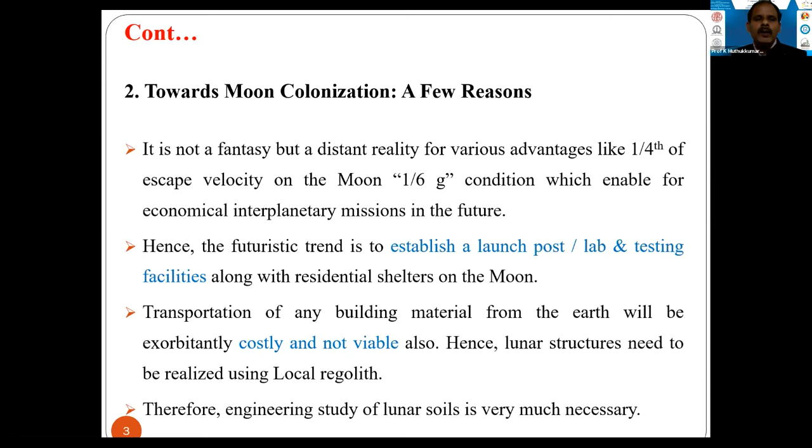Therefore, the engineering study of lunar soil is very much essential. As some of you may be aware of the recent missions, especially Chandrayaan-2, basically we want to build a rover system. This rover consists of several wheels, and the wheels will be decided with respect to the weight of this rover, as well as how these wheels interact with the regolith, the lunar bed.

So based on these aspects, our lunar vehicle rover wheel needs to be designed. Typically you can see on the right hand side, this is the Apollo rover mission. So the primary aspect is we need to know about the interaction between wheel and soil.

There are two things with respect to the interaction study: whether our wheel is a rigid wheel or a flexible wheel. This is typically what we have in the terrestrial transportation system on Earth. Basically, we build a good surface pavement system, and this pavement system is decided based on the soil condition present at the project location.

So you can do a systematic study on the subsurface, subgrade soil, and depending upon the subgrade soil characteristics, you can make a proper pavement system. Over that, you'll have your wheel movement. So here your wheel is moving on a relatively rigid surface, and the whole resistance is governed by the frictional resistance between the wheel and the subgrade pavement system. So the problem is very simple.

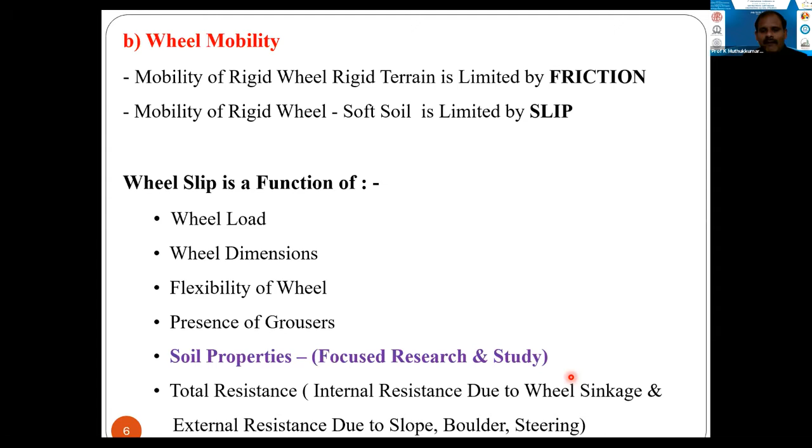But we'll be concentrating more on how these moonquakes are going to have an impact on the constructed facilities, assuming that we are going to create a shelter, our own landers and rover. So how this system is going to have an impact when we have a moonquake - that is what this study is going to explain.

So the performance parameter, especially decided with the wheel soil interaction, is based on four important aspects. One is the sinkage - how the wheel is going to settle on the soft lunar terrain, and how much the settlement. With respect to the settlement, we need to design what torque we need to apply to the wheel to move on that particular surface.

And the slip - the limited climbing capacity and steering radius needs to be decided with respect to the slip which is created between the soil and wheel. And drawbar pull is very, very important, it reveals the maximum resistance that can be overcome by the wheel such that wheel movement will progress further. And the drive torque is completely decided by the motor specification requirements, all with respect to the wheel soil interactions.

Since the lunar soil is primarily an influencing factor of lunar mobility, it is very essential to assess the geotechnical properties of the lunar soil for the design of lunar rovers and landers. So as the primary objective, we have done a study related to the geotechnical characteristics of the lunar soil.

Both the bearing as well as the traction capacity of the soil depend on the shear characteristics of the soil. The shear strength parameter of the soil depends on the angle of internal friction, cohesion, and the shear deformation modulus. The bearing capacity with respect to trafficability depends on the settlement due to soil compaction under vehicle weight.

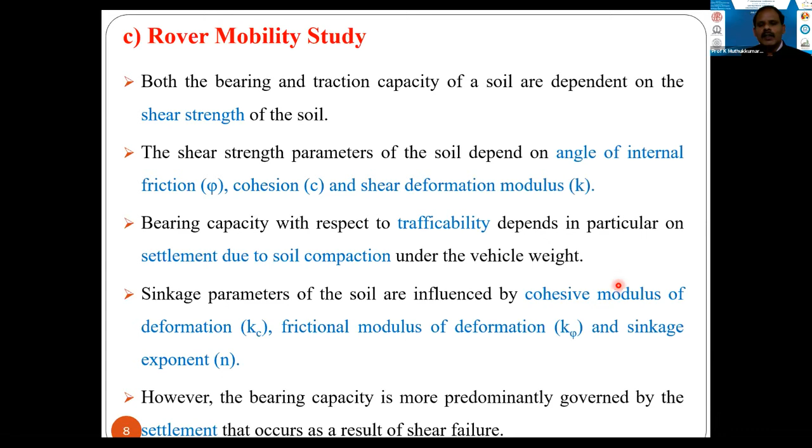With this background, we intend to characterize this developed lunar soil material. We concentrated on these properties: especially the cohesive modulus of deformation, friction modulus of deformation, sinkage exponent, cohesion stress and friction angle, shear deformation modulus, wheel sinkage ratio, and the wheel soil coefficient. These are the important aspects as far as considering the tests we have conducted.

So from the direct plate load test, these parameters can be obtained. And from the direct shear test, we can get these parameters.

From the wheel soil interaction study, we can get all other remaining parameters. Coming to the moon surface, it is not like our Earth surface where we normally deal with a 3-phase system of solid, water, and air. The moon is a monophase system, completely solid phase only. The soil is a single grain structure.

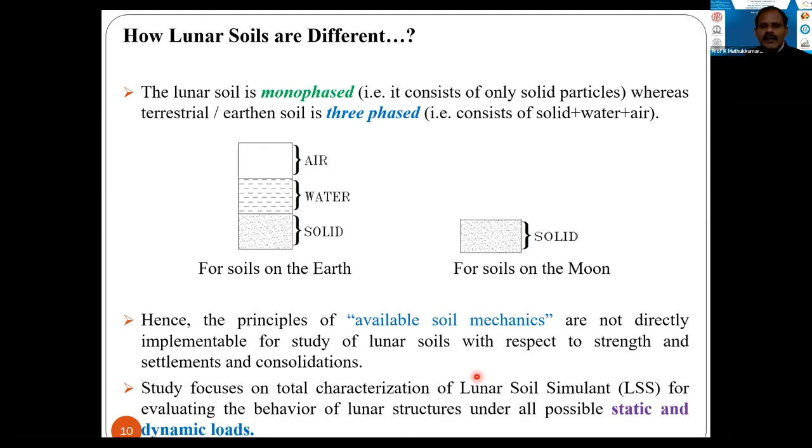So the existing theory we have considered for Earth, the so-called soil mechanics, may not be directly applied to the moon surface. The available soil mechanics are not directly implementable for studying lunar soil with respect to strength and settlement. So the study focused on total characterization of lunar soil simulant for evaluating the behavior of lunar structures under all possible static and dynamic loads.

We basically followed the terramechanics principle to obtain these lunar characteristics. This is the typical lithology of this lunar material. Up to the top 10 meters, we normally call it the regolith material. This material is fine grain, a reworkable surface deposit, and the relative density varies from 60 to 65 or 70 depending on the location. It is grouped under the medium dense category of surface, followed by several subgroups, and our main focus is this region.

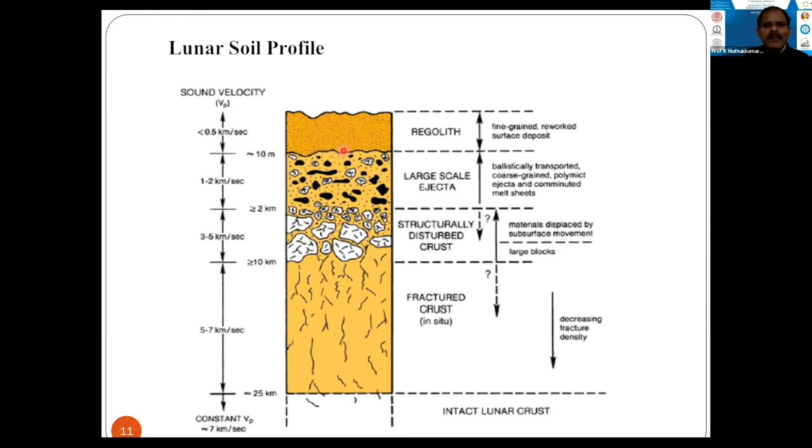As far as lunar rover mobility is concerned, our primary focus is the regolith material, as the foundation is also expected to be within this region and depth. So our primary focus is to create a simulant such that its characteristics are more or less the same as the lunar regolith material. That is what we extended.

We have a limited lunar soil brought back from Apollo missions, almost 380 kg of returned sample, most available with NASA. NASA has given clear guidelines with respect to the simulant, and the simulant properties have been developed by NASA based on the Apollo missions return sample.

Our primary focus is to map a material such that its mineralogical composition, chemical composition, and mechanical composition are as similar as possible to the brought-back moon soil. That is our primary study.

The soil grain is mostly less than 1000 microns, with a major percentage being fine grained soil, 20 to 800 microns. There is a predominant amount of fine grained soil less than 75 microns, but this material is completely inert, as there is no water on the moon surface and no possibility of developing cohesive stress. The predominant force is frictional rather than cohesive, even though the particle size is small. So we call it a non-plastic material, even though it significantly consists of particles less than 75 microns.

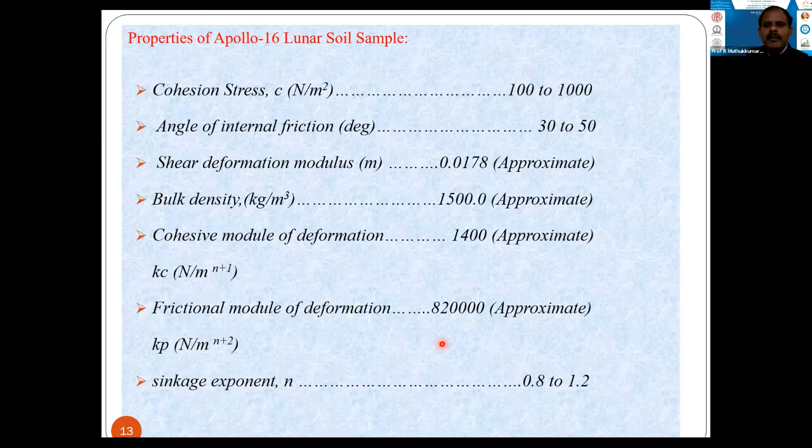These are the properties given by NASA related to the Apollo 16 mission, and our primary idea is to map these characteristics with respect to the developed simulant.

One aspect is we want to map the material's flow properties to the lunar regolith condition. The second important aspect is how this material responds to the actual lunar environmental conditions, which are completely different.

We have a huge temperature variation, minus 150 degrees to plus 107 degrees centigrade. Even in the polar region the variation is slightly higher, and at the equator the temperature is much more than given here. So there is a huge temperature difference between the polar and equator regions, and from day to night. The material we develop must withstand that huge temperature variation with limited property change, which is a very important aspect.

We want to simulate a simulant such that it can endure the huge temperature variation. The second important aspect is continuous meteoroid impact, which creates a lot of radiation effect on the soil material, especially in the regolith material within the top 10 meters depth. So lunar materials and structures should optimally resist dynamic stresses caused by moonquakes, and also mechanical impact transferred by continuous bombardment from asteroids and meteoroids.

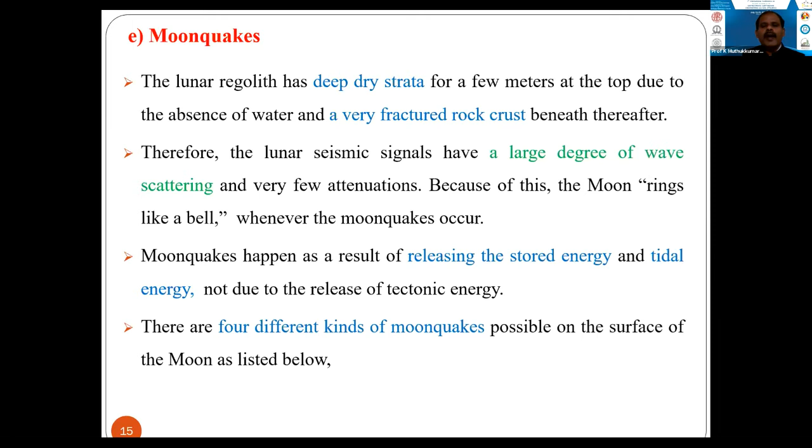So there are 4 different kinds of moonquakes possible on the surface of the moon that are listed here. The shallow moonquake happens from 20 to 30 kilometers below the surface - this is of more concern for us than the deep moonquakes. The deep moonquakes occur about 700 kilometers below the surface, probably caused by tidal variation, basically called the moon tides.

And the vibration from the impact of meteoroids is another important aspect - this is like a local vibration. Since the moon is subjected to a lot of meteoroidal impact, those who have seen the moon surface might have seen a lot of craters. These craters have been created because of continuous meteoroidal impact. Some of the craters are several kilometers in radius, creating time-bound vibrations. These vibrations will also be a cause for concern when we have a structure which is very close to this kind of meteoroid impact.

Another important aspect is the thermal quakes, caused by the expansion of the frigid crust first illuminated by the morning sun after 2 weeks of deep freeze. So huge thermal change, temperature variation, is also creating thermal quakes. These are the 4 important aspects. As far as the lunar structure is concerned, shallow moonquakes and the impact of meteoroidal and thermal quakes are very, very important, so we need to have our regolith protected.

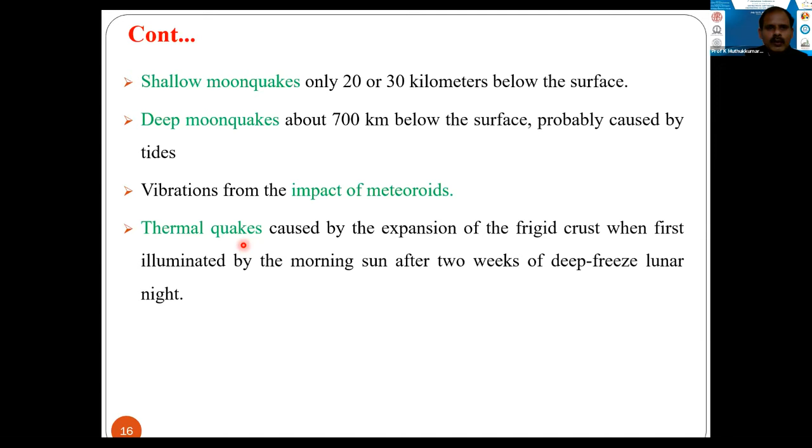We need to protect our structure against these kinds of moonquakes. Deep moonquakes happen with respect to the tidal periodicity, once a month or 7.5 months, depending upon this periodicity. The shallow moonquakes are the most energetic seismic events compared to the deep moonquakes and release more energy.

The third type of moonquake is impact, which occurs regularly due to the impact of meteoroids. Apollo seismometers in the Apollo missions 12, 14, 15, 16, and 17 continuously installed seismometers on the moon surface, and these seismic events have been measured and monitored by the Apollo missions. Based on that data, they have reported recording almost 13,000 moonquakes - deep quakes, shallow quakes, and a combination of all these things.

Normally, according to the Richter scale, the measurement magnitude of moonquakes was less than 3 and mostly less than 1. So the occurrence of magnitude 3 moonquakes is very rare, but the most common type of occurrence of moonquakes is close to Richter scale 1.

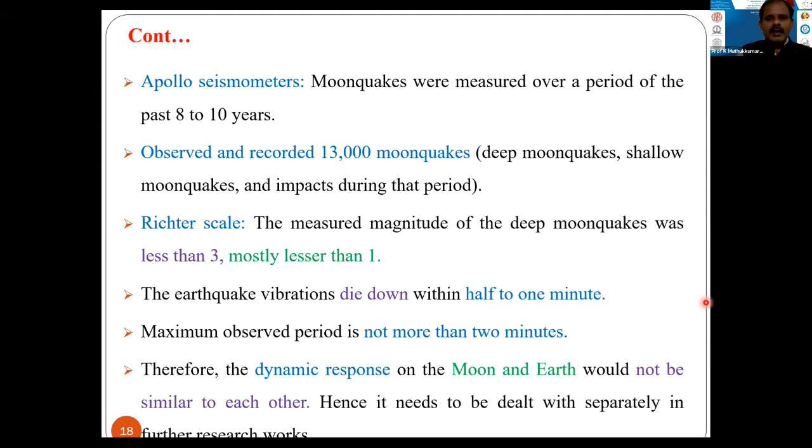So these are such low energy moonquakes. The moonquake vibration dies out within up to 1 minute, and the maximum observed period is not more than 2 minutes. Therefore, the dynamic response of the moon and earth would not be similar to each other.

Hence we need to deal with this separately and develop a theory for moonquakes. Some literature outcomes show that the occurrence of moonquakes rarely reaches 3+ magnitude, these are shallow moonquakes, and the most frequent occurrence moonquakes are having...

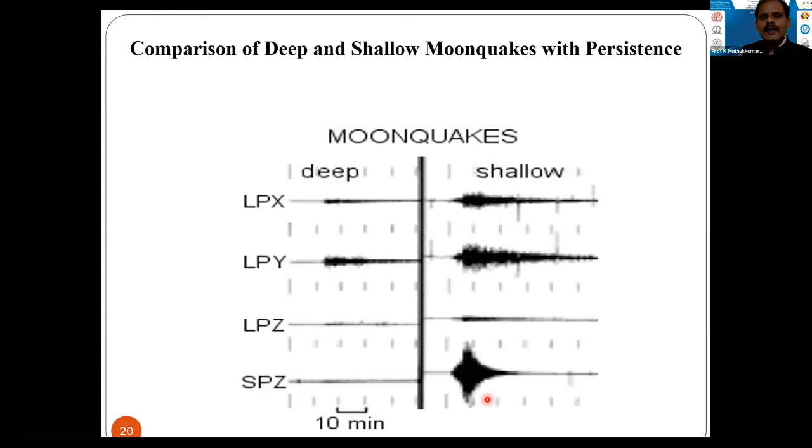Sure. So this is just a comparison about deep and shallow moonquakes. On the right side you have the shallow quake, which is the one having more impact on the surface. If at all we have any structure on the surface, we'll be in trouble. We need to really consider this aspect. And this is the occurrence of the deep quake with respect to various time frames.

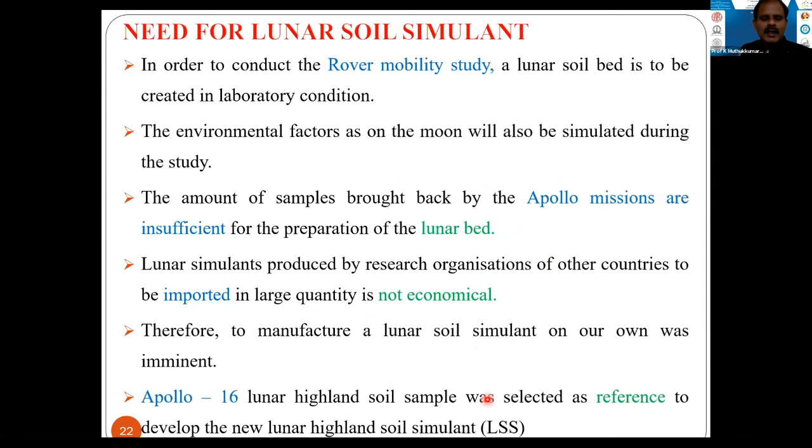So considering all these aspects, the primary focus is we need to develop a simulant, and then we need to study the simulant with respect to all these characteristics discussed so far.

So, the development of new lunar highland soil simulant, what we did: we have taken Apollo 16 as a reference, and we want to do the complete study for Chandrayaan 2 and 3, the Chandrayaan 3 mission project is going on. We need about 50 tons of LSS for doing all this rover and lander study in the ISRO laboratory. So for that we did a systematic analysis.

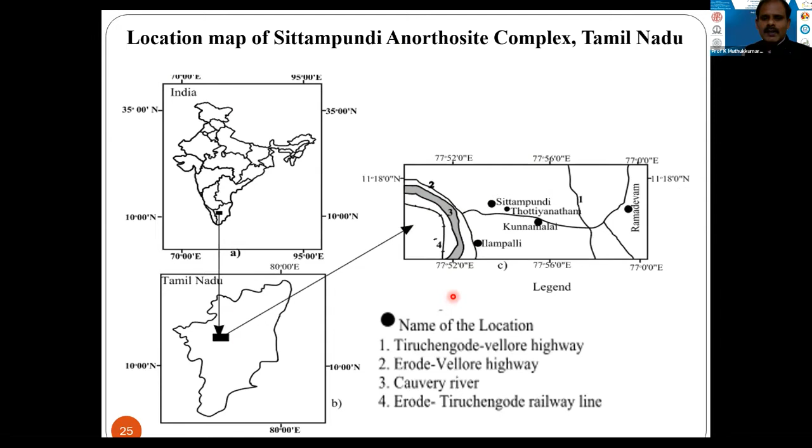We identified the material near Salem, Tamil Nadu, at a place called Sittampundi, where we have plenty of anorthosite rock specimen. This anorthosite rock consists of chemical and mineralogical composition similar to the lunar regolith.

So we have taken this comparison with respect to chemical composition, and based on that we have taken the anorthosite rock and characterized it. Basically it is pulverized and made into different categories. We have grouped samples A to E with various grain sizes, 30 to 1000 micron, which is the predominant group in the lunar soil.

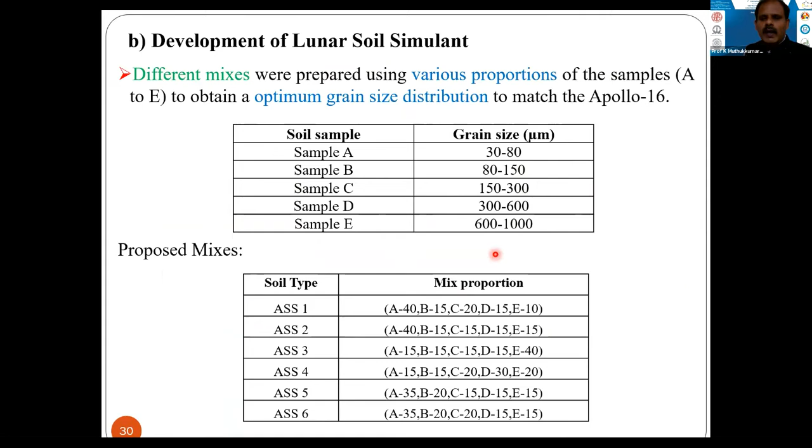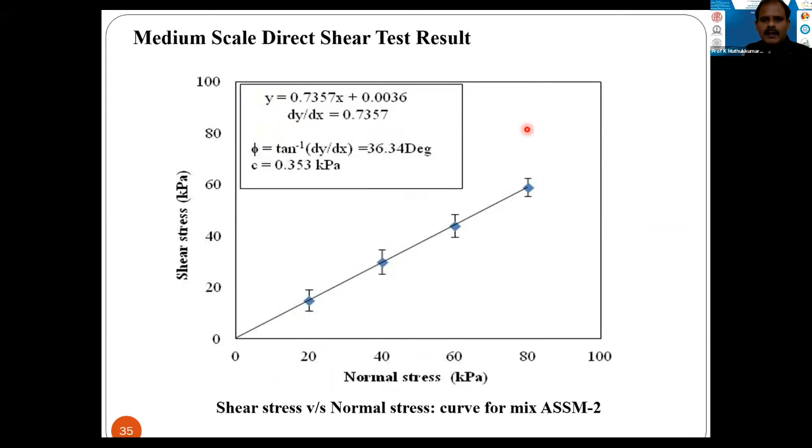So the testing was extended to all other engineering characteristics, starting from direct shear test, compaction test, consolidation test, and triaxial test, and basically we want to obtain the potential.

A very important aspect is determining the sinkage exponent, basically what will be the sinking capacity of the material. We simulated this in the laboratory by conducting a simple plate load test. A very important aspect is that the rover wheel design will be decided based on the sinkage exponent, specifically the cohesive modulus of deformation and the friction modulus of deformation.

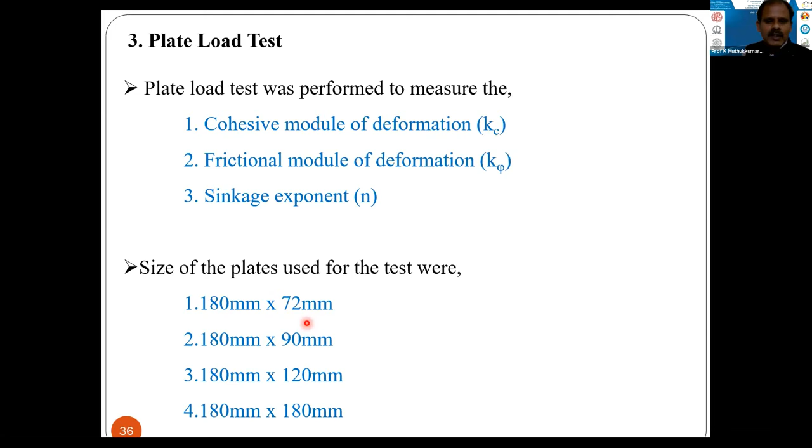For that we took different aspect ratios of the plate, keeping the length at 180 millimeters constant, varying the width from 72 to 180, maintaining an aspect ratio from 1 to 2.5. That aspect ratio decides the slip as well as the friction of the wheel, and based on that we evaluated both the cohesive modulus and friction modulus.

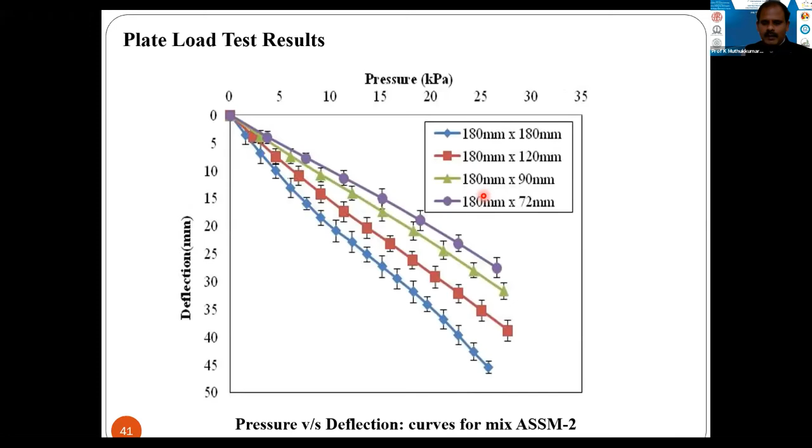And this is the developed material. Using that, all other properties have been obtained using all the mixes ASSM 1 to 6. Finally, ASSM 2 was decided as the one having material properties very close to Apollo 16, and that has been designated as ISAC 1. In fact, this LSS ISAC 1 has been patented by the Indian Patent Office, ISRO.

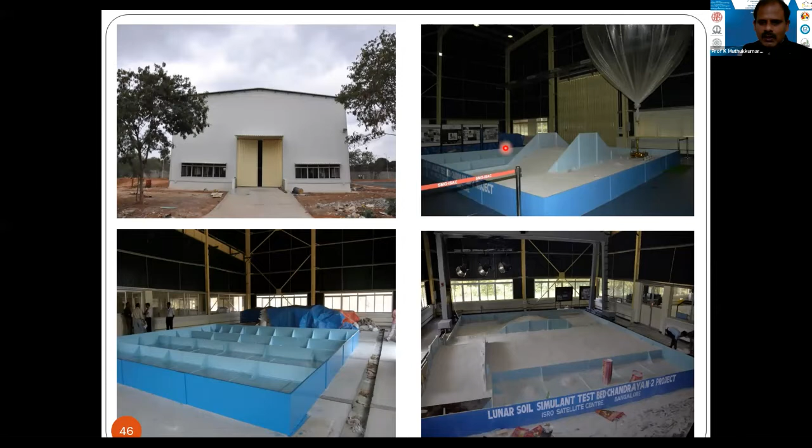This material has been further extended with the study in the actual lunar bed created by ISRO laboratory, considering the rover study. The rover study simulated 1/6 G condition using a helium balloon, and xenon lamps were used to create the temperature effect. The vacuum condition has not been created. The developed material has been extended for further study in the laboratory and applications.

Coming to the dynamic characteristics, we used the cyclic triaxial apparatus and Bender element method to estimate the dynamic characteristics of this material. Using cyclic triaxial apparatus for various confining pressures, we calculated the shear deformation modulus and damping ratio. Using the Bender element, we got the maximum shear modulus of the soil.

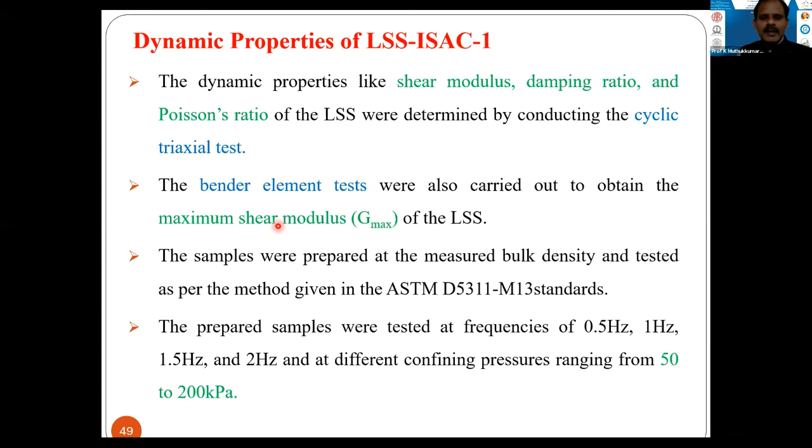We considered various frequencies from low to high, 0.5 to 2 Hertz, with various confining pressures, 50 to 200 kilopascal, considering from top surface to 3 to 5 meter depth, where our point of interest is with respect to the foundation.

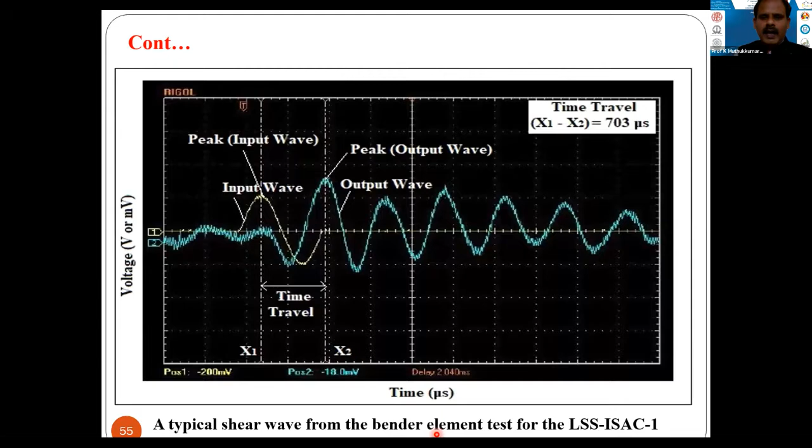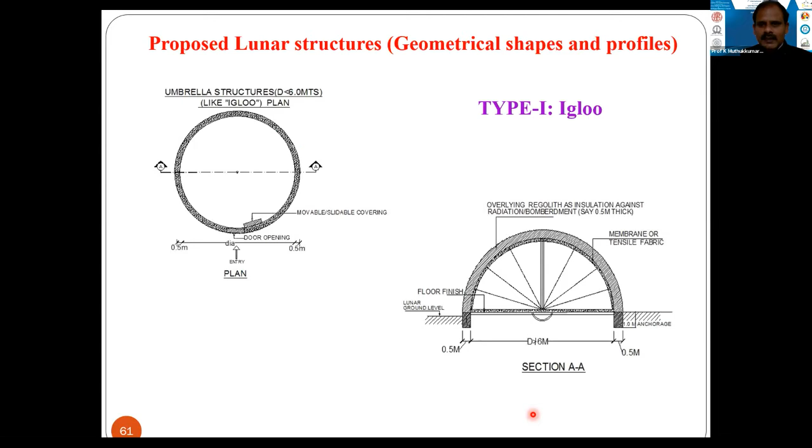We thought of extending this particular study to the lunar structure, and we have done a different lunar structure analysis. The proposed types of structures we started with are an igloo kind of structure, an egg shape, and a segmental shell dome. All this is basically under vacuum condition, and we want to create living comfort for the astronaut, so we need to pressurize the inner chamber close to 100 kilonewton per meter square atmospheric pressure.

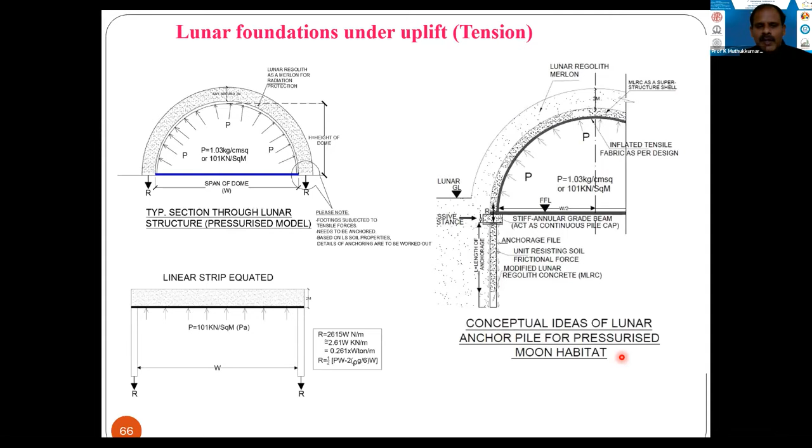When you introduce that 100 kilonewton per meter square atmospheric pressure in the chamber, it will create uplift pressure for the structure. So the primary focus is we want to create the foundation structure with respect to the uplift pressure, and that is what presently we are researching. Preliminary research shows that providing a stiff raft foundation system with an anchor pile will have enough resistance against the uplift pressure.

We are also extending this study to create a 3D printing of the igloo structure to simulate the real condition with respect to the uplift pressure. That is what we are extending.

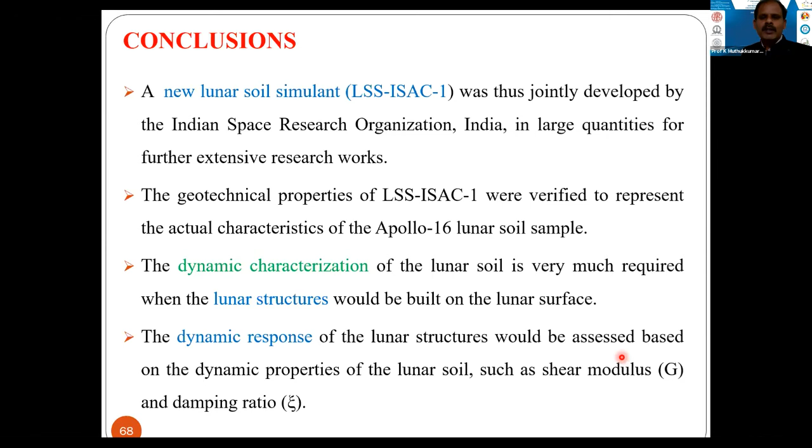Coming to the conclusion: a lunar soil simulant was jointly developed by Indian Space Research Organization and large quantities produced for further extensive research work. The geotechnical properties of LSS ISAC-1 were verified with respect to the Apollo 16 mission. The dynamic characteristics of the lunar soil are very much required for the lunar structures that would be built on the lunar surface. The dynamic response of the lunar structure would be assessed based on the dynamic properties of the lunar soil, such as the shear modulus and damping ratio.

The cyclic triaxial test was performed effectively to simulate the moonquake conditions at the laboratory level. The dynamic properties were assessed based on the moonquake conditions in terms of different frequencies and confining pressure. The dynamic properties of LSS ISAC-1 would hopefully be very useful for further research work on moon colonization aspects.

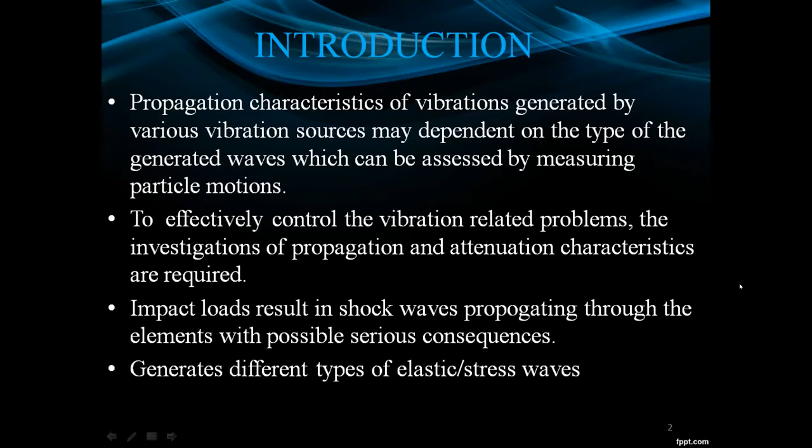To effectively control vibration-related problems, investigation of propagation and attenuation characteristics is required. Impact loads result in shock waves propagating through the elements with possibly serious consequences, so it's very important to find out the characteristics of waves prior to construction.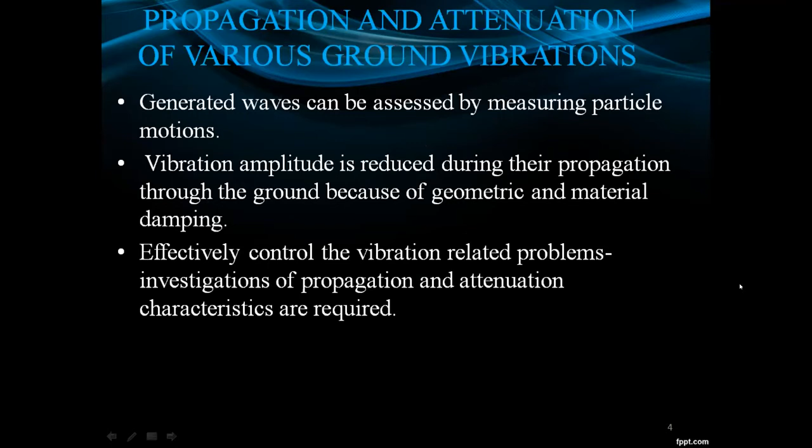When a wave moves through a medium, only energy is transported, no material. When a load is suddenly applied to a body, the whole body is not disturbed at the instant of loading—the parts closest to the source of disturbance are affected first, and the deformation produced spreads throughout the body in the form of stress waves. These generated waves can be assessed by measuring particle motions, that is acceleration. Vibration amplitude is reduced during propagation through the ground because of geometrical and material damping. To effectively control vibration-related problems, investigation of propagation and attenuation characteristics is required.

The importance of the study is to accurately predict the magnitude of ground vibration that results during construction activities at the site. As construction works today are often located in urban areas, along with society's increasing concern about environmental impact, the need for vibration prediction prior to construction is of immediate interest, and reduction of vibration is very important. So the study of attenuation of vibration requires special attention.

The objectives are to increase knowledge and understanding in the field of ground vibration due to impact loading, and to fabricate a test setup for conducting impact load tests in the laboratory; to conduct laboratory model studies investigating the vibration propagation characteristics of different types of soils using an impact hammer; and to study the peak particle velocity and acceleration due to changes in hammer energy, relative density, type of soil, and distance from source.

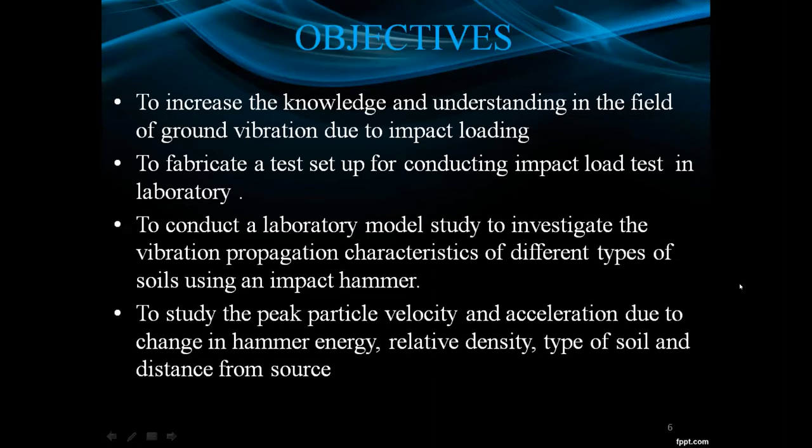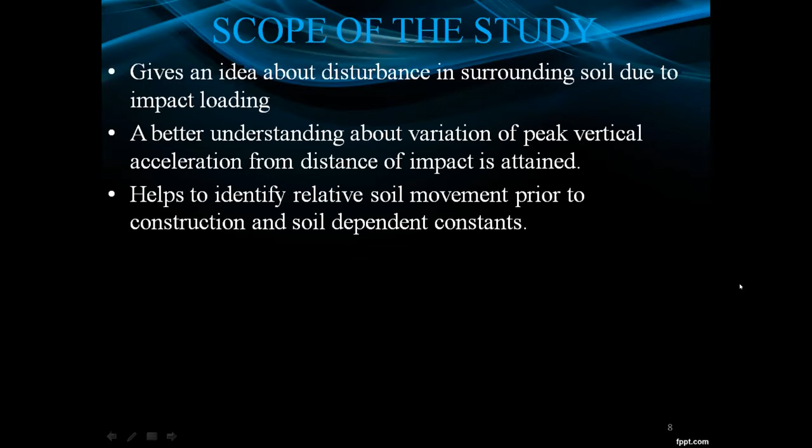The main objective is to evaluate the soil dependent parameters and develop an equation to predict vibration. Scope gives an idea about disturbance in surrounding soil due to impact loading. A better understanding of variation of peak vertical acceleration from distance of impact helps identify relative soil movement prior to construction and soil dependent constants.

For my study, to study the wave propagation characteristics of different types of soil, I have used 3 types of soil: silty sand, river sand, and lateritic red soil, to find what are the different wave characteristics while changing the type of soil. These soils were collected from various parts in Kochi itself.

Next are impact energy and relative density, changing relative density between 30% and 60%. Then impact hammer energy: I used a 10 kg load with its height of fall varying to create different impact energy, varied from a minimum of 50 joule to a maximum of 170 joule. Distance of measurement from the source of impact is 0.25 meter and 0.45 meter from the point of impact.

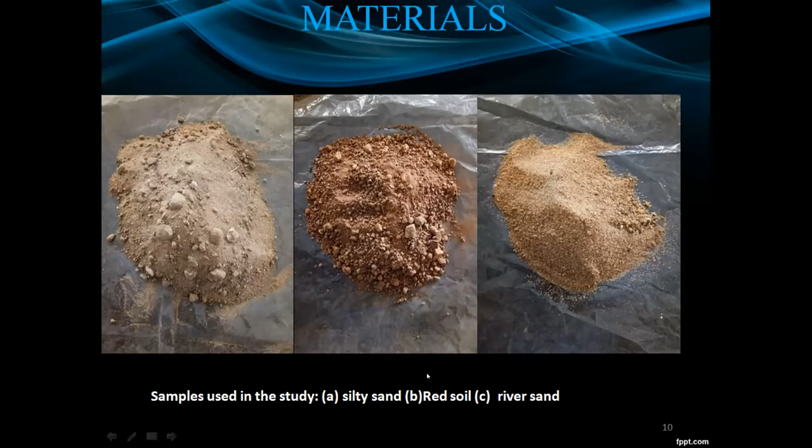This is the test setup. I used a steel tank of length 1.2 meter, width 0.7 meter, and height 0.9 meter, with stiffeners provided on the sides of the tank to prevent bulging during the experiment. Impact load was applied using this hammer, which is mounted on a pulley and properly guided using an MS pipe for concentric loading.

This is the setup, this is the entire setup. Accelerometers are connected here, and finally connected to the system.

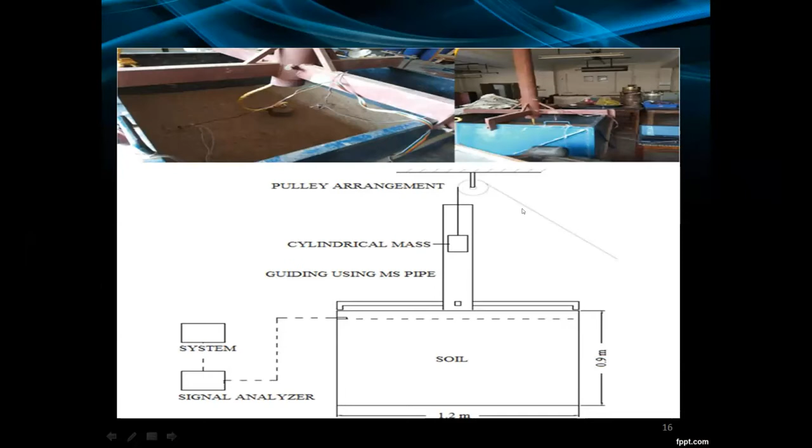I used ADXL 335 for measuring acceleration. It is a small, thin, low power, complete 3-axis accelerometer with signal conditioned voltage outputs. Various studies say it gives satisfactory readings. For programming, Arduino Uno was used.

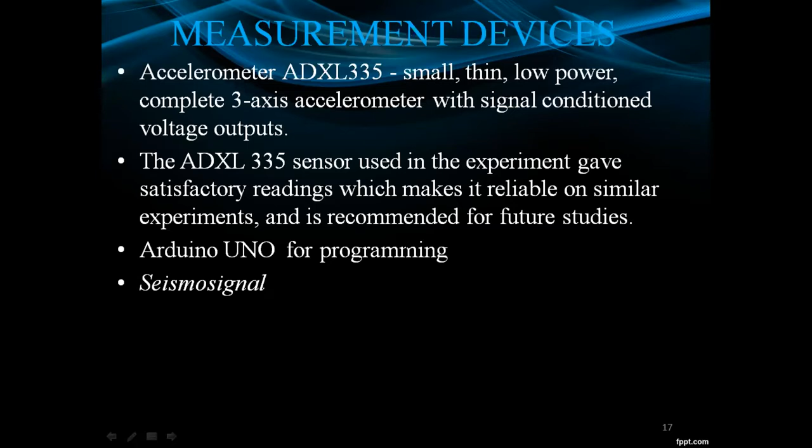Seismo Signal was used for finding velocity. This is all about ADXL, a brief description about the ADXL 335 accelerometer.

Its acceleration can be found in a range of plus or minus 3g in x, y, and z axis. This is the working of an ADXL 335 accelerometer. A phase sensitive demodulation technique is used for finding acceleration.

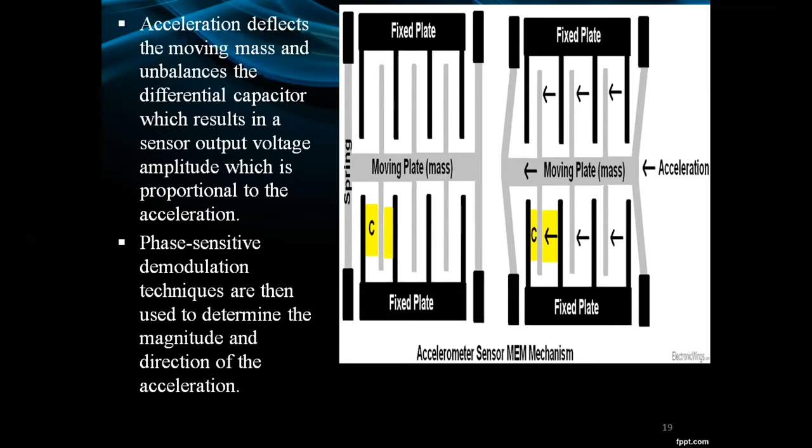Arduino board was used. The test procedure: vertical impact tests were conducted to simulate different impact energy. A falling mass of 10 kg is used with different dropping heights, 0.5 meter and 1 meter, for creating different hammer energy. The energy varied from 50 joule, that is mgh, 10 into g into 0.5.

The response of the soil during impact was measured by 2 accelerometers, which were connected with the Arduino, which in turn was connected with the laptop.

The study was conducted for finding wave characteristics by varying relative density of soil, type of soil, distance from source, and hammer energy. 2 accelerometers were used, one at a distance of 0.25 meter from the source of impact and the other at 0.45 meter from the source of impact.

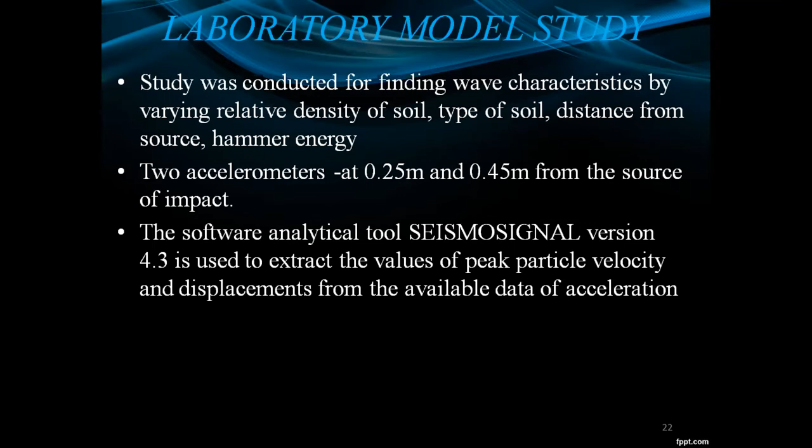Tests were conducted by varying type of soil (river sand, red earth, silty sand), by varying relative density (30% and 60%), by varying distance from source of impact (0.25 meter and 0.45 meter), and by varying energy through height of fall.

The result obtained for red soil: A1 is the acceleration value obtained at a distance of 0.25 meter, V1 is the corresponding velocity, and S1 is the corresponding displacement.

Neetu, sorry to interrupt you, about 3 minutes time. Try to finish a little fast. Yeah, thank you very much. Sorry to interfere. Okay sir, okay.

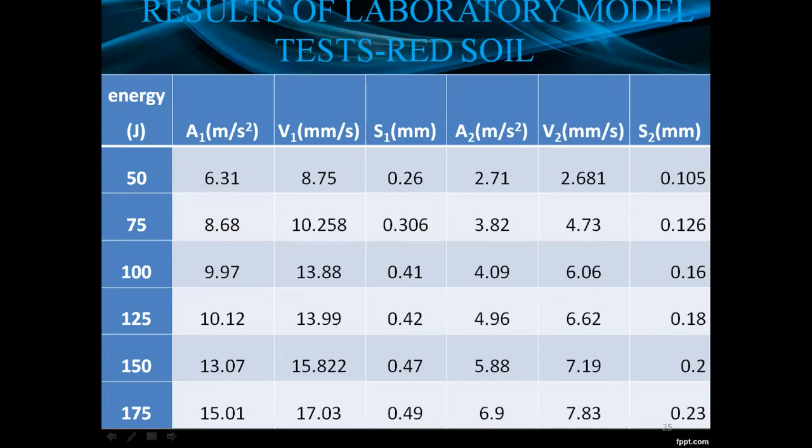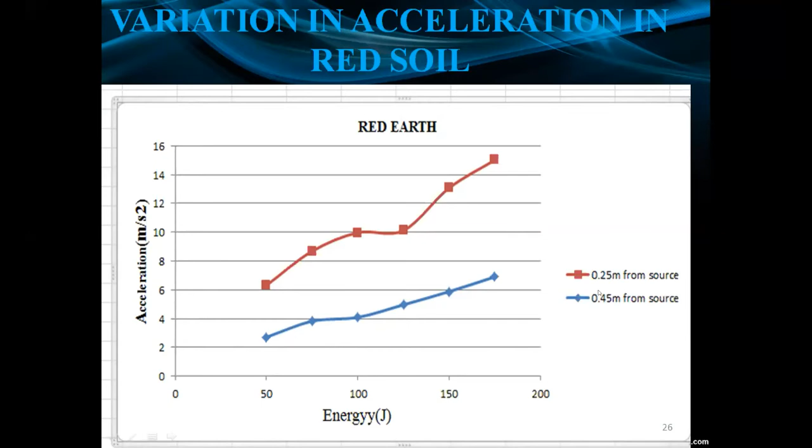This is the test result for red soil. From this graph connecting acceleration and energy, the red line corresponds to 0.25 meter from source. It is clear that as distance from the source of impact increases, acceleration decreases.

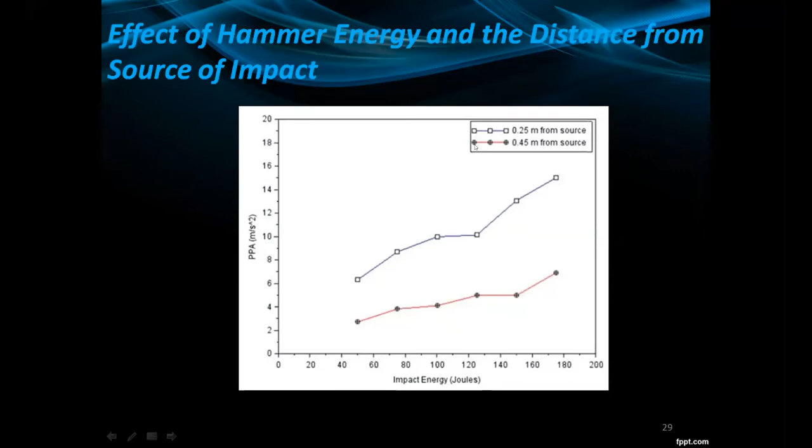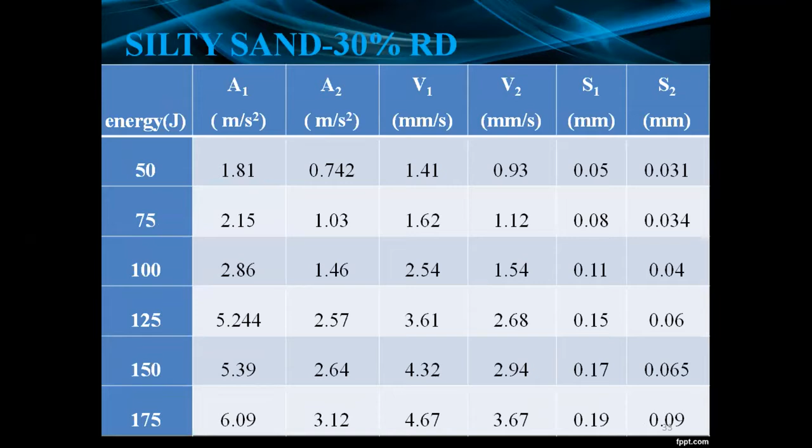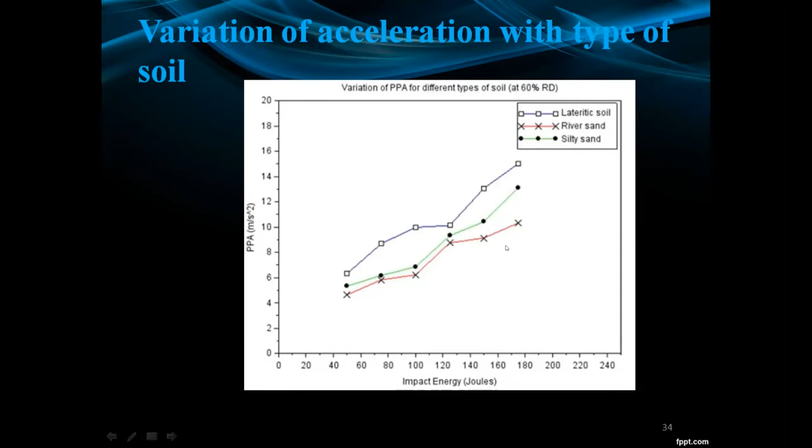While comparing all three types of soil, it is observed that peak acceleration is higher for lateritic soil compared to river sand and silty sand.

Finally, from these values, from the acceleration peak and vertical velocity values, we can obtain soil constant according to Wiss 1981: V equals K into (D by root of En) all raised to minus n. From that, the soil constants obtained are for lateritic soil 0.11 and 1.44.

Concluding, laboratory model studies were conducted by fabricating a model to investigate the wave propagation characteristics and attenuation of waves in different types of soil using an impact hammer. The effect of vibration by varying different parameters, that is type of soil, relative density, drop height, and distance from source, was studied.

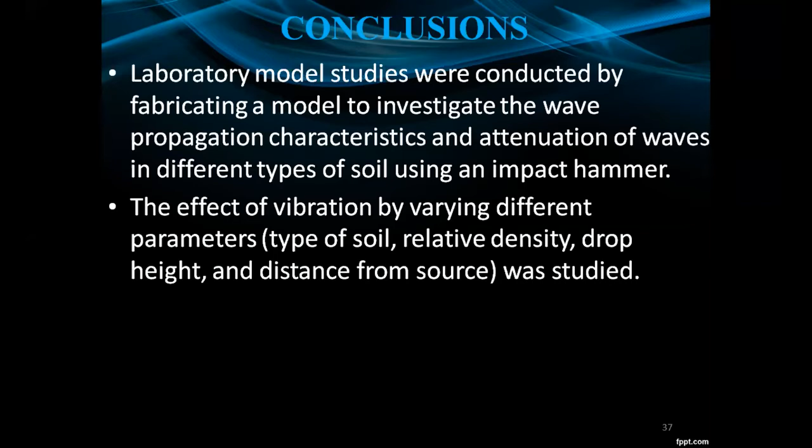The acceleration induced in the soil was measured using ADXL 335 accelerometers and a data acquisition system placed at different positions. Peak particle velocity and displacement were also found from the acceleration values with the help of SeismoSignal software. The test setup developed in the laboratory can reasonably predict the wave propagation and attenuation in soil.

The peak vertical acceleration observed at 0.25 meter from the source is more than the peak vertical acceleration value observed at 0.45 meter. This is due to attenuation of waves with increasing distance from the source.

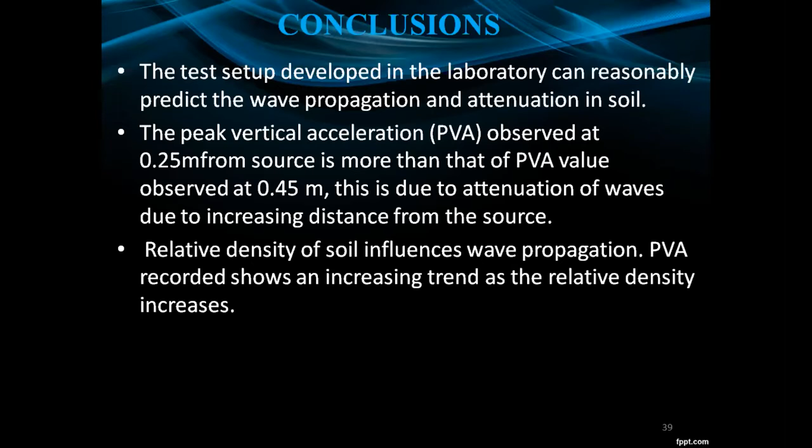Relative density of soil influences wave propagation. Peak vertical acceleration recorded shows an increasing trend as the relative density increases, and it increases in all conditions as hammer energy increases.

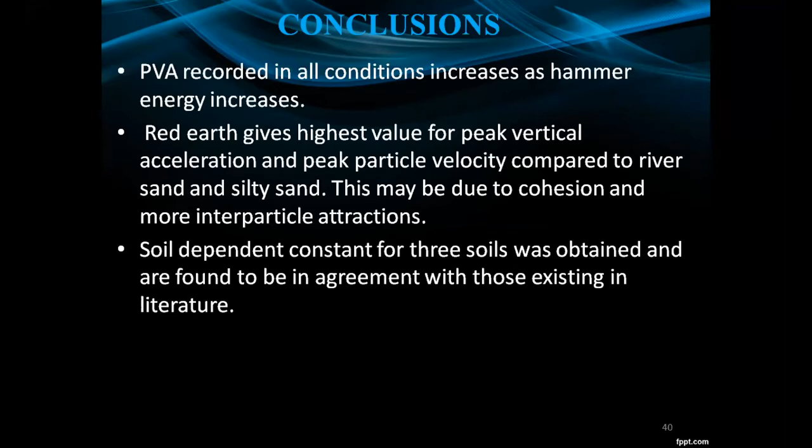Red earth gives the highest value for peak vertical acceleration and peak particle velocity compared to river sand and silty sand. This may be due to cohesion and more interparticle attraction. Soil-dependent constants for the three soils were obtained and found to be in agreement with those existing in literature. And these are my references.

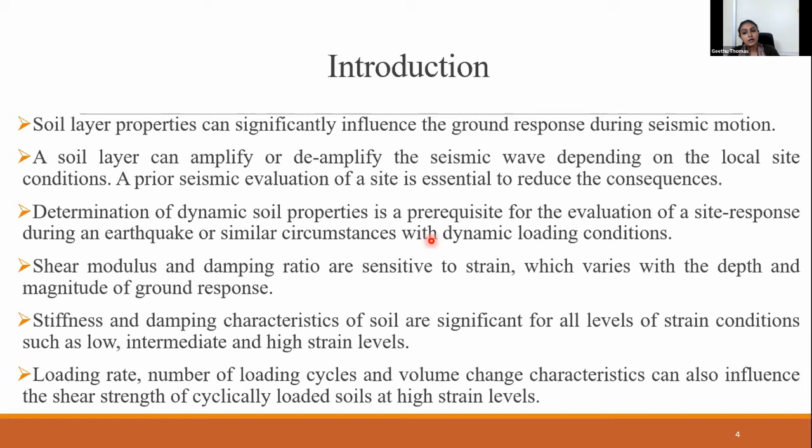For a dynamic response, for the evaluation of dynamic soil properties, the main parameters considered are shear modulus, damping ratio, and Poisson's ratio.

We all know that soft clay is very much prone to lateral deformations and has high compressible nature. So it is very necessary to evaluate the behavior of soft clay under dynamic load conditions. They are prone to stiffness degradation even under static loading. An amplified ground motion can be expected in high plastic clays under seismic loading. So the present work is aiming at reducing the ground amplification in the presence of soft clay in a site.

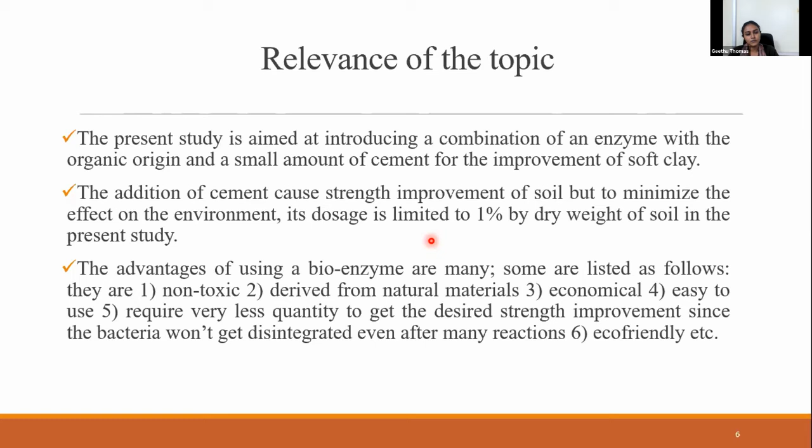By adding a non-traditional additive, the present study uses a bioenzyme which is originated from a vegetable extract, along with the traditional additive cement in a small percentage only. The relevance of the present work is aiming at introducing a new combination of bioenzyme along with a small percentage of cement to improve the dynamic soil properties of the soil.

For the present study, the soil samples were collected from a site in Ernakulam, which is considered a site with poor soil condition, but construction activities are ongoing there.

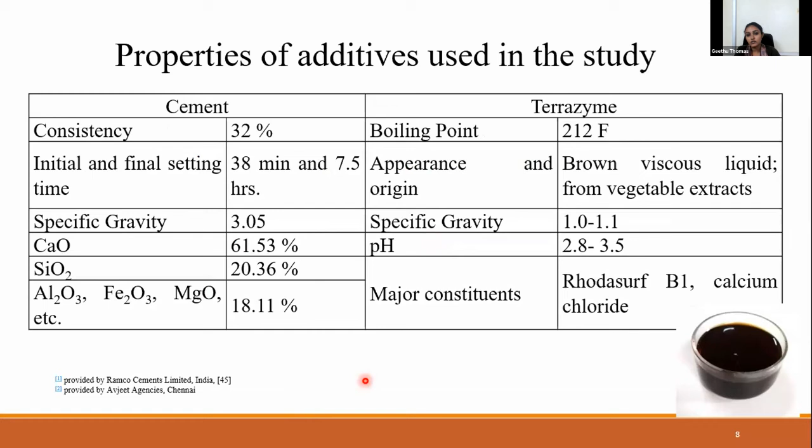The additives used in the present study are cement and Terrazyme. Terrazyme has a natural origin, extracted from vegetable waste. The additive dosage used is 1% cement, in order to reduce the use of traditional additive, and the optimum dosage of Terrazyme was found out from the unconfined compressive strength test as well as consistency limits test.

From the evaluation of unconfined compressive strength results, we found that Terrazyme dosage 2, meaning 220 ml per 2 meter cube of soil, gives the best result. That means almost 4.5 times the unconfined compressive strength of untreated soil increased because of the presence of 1% cement and Terrazyme dosage 2.

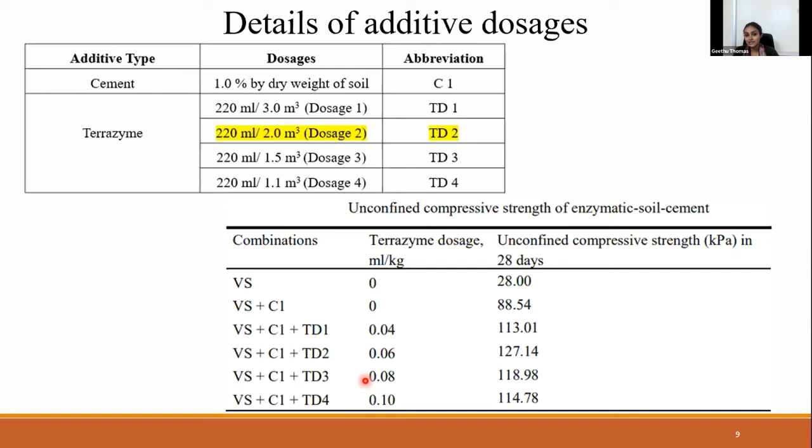For finding out the dynamic soil properties of the soil, cyclic triaxial tests were conducted in the laboratory. Initially, samples were prepared to obtain a uniform mixture before and after treatment. The samples were prepared in slurry form and preloading was applied for 1 month until the volume changes and settlement became constant.

Then saturation is applied until the B value, Skempton pore pressure ratio, becomes 0.96 or more. Then consolidation is given until the volume change becomes constant. Then cyclic shearing is applied.

The details of the cyclic triaxial test for the present study are shown in this table. Strain control test is conducted and 150 kPa of effective confining pressure is given.

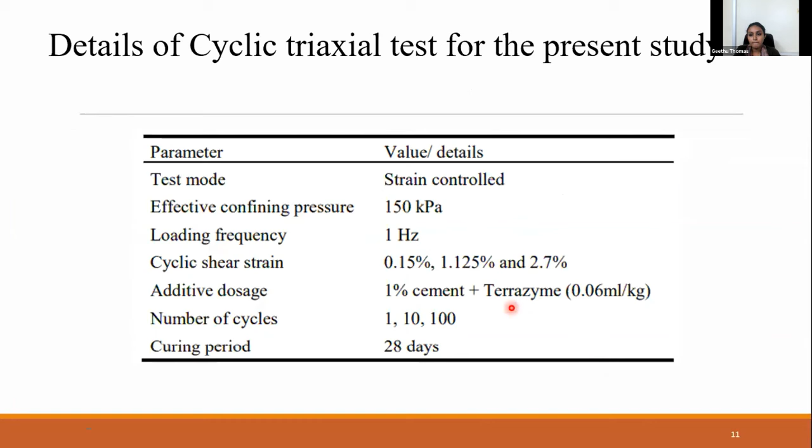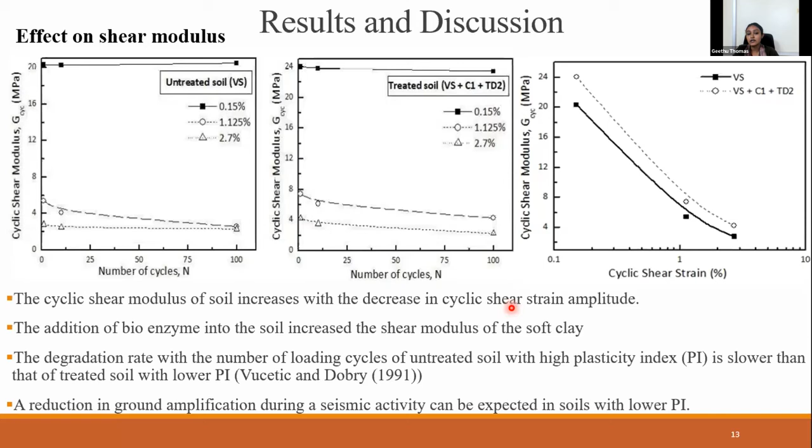The treatment effect on shear modulus is illustrated in this graph. You can see that the shear modulus increased significantly in the presence of 1% cement and Terrazyme, and the degradation rate of shear modulus is lower in the case of treated soil. This means a better seismic response is expected in the treated soil.

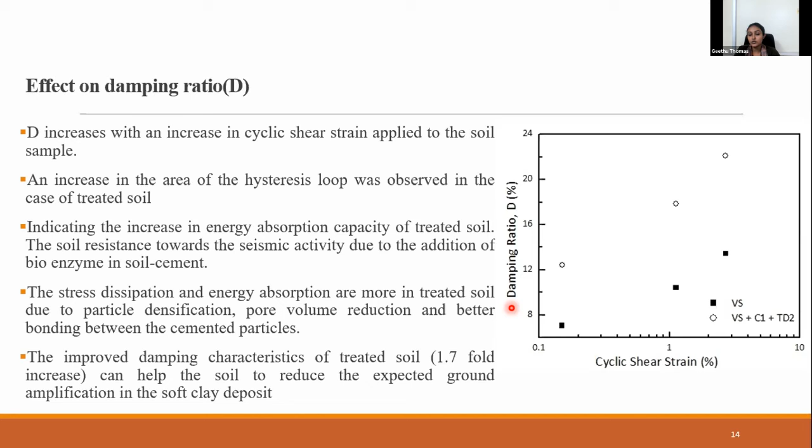The damping ratio increased 1.7 times that of untreated soil. This means stress dissipation and energy absorption is more in the treated soil, due to particle densification and pore volume reduction, which means the soil can reduce ground amplification because of the treatment.

The reason behind the strength improvement can be explained by two words: biocementation and bioclogging. In the presence of bacteria, the cohesive bonding between soil particles increases, which is called biocementation, and the pore voids are filled with calcium silicate hydrate gel, which reduces the pore spaces.

Sorry to interrupt you, you have less than 2 minutes. Okay, sir. Okay, sir.

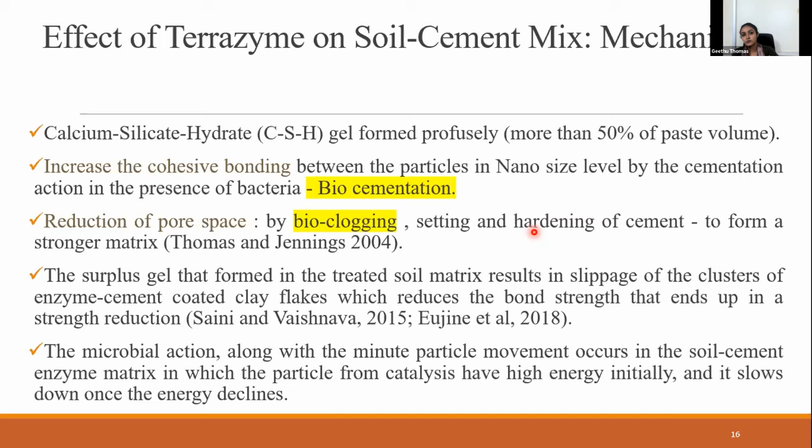But a surplus gel, meaning C-S-H gel produced after addition beyond the optimum dosage, will result in a reduction in strength because the excess gel causes slippage between the particles of soil.

In conclusion, enzymatic cement treatment in soft soil can be applied effectively in the field, especially for foundation stabilization, which can improve both static soil properties and behavior under cyclic as well as seismic loading conditions. This will be a good initiative to reduce the use of traditional additives such as cement, fly ash and lime, which can cause severe damage to the soil as well as groundwater in the future.

So the present work could be applied in the field for improving soil properties, mainly in the case of soft clay.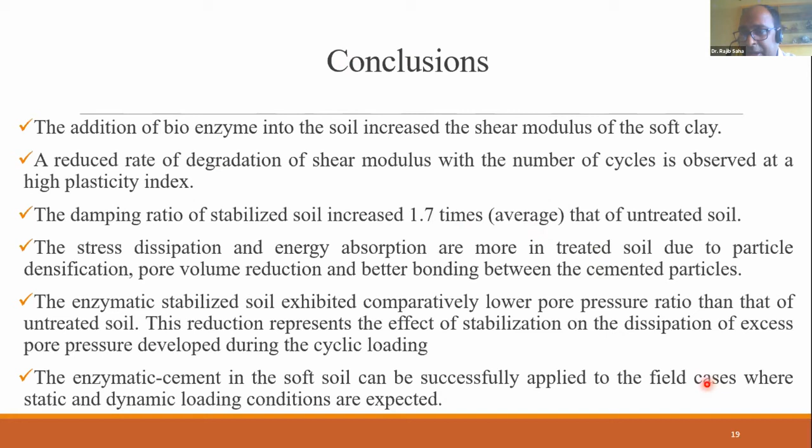My first question to you is, you indicate that the shear strength is improving, but at the same time the damping ratio is not reducing, it is increasing. I am a little doubtful in accepting it. Usually when the material becomes stiff, damping should go down. Would you like to comment about it?

Sir, that means because of the pore volume reduction and the better bonding between the particles, and because of particle rearrangement also, more strain energy is getting absorbed by the soil particles. That might be the reason. I am not very sure.

Usually if you add cement, going from loose to dense sand will have more shear strength. If you try to stabilize any material with cement, shear strength will improve, but the damping ratio usually becomes lower. So kindly check whether you are having any trouble with the measurement.

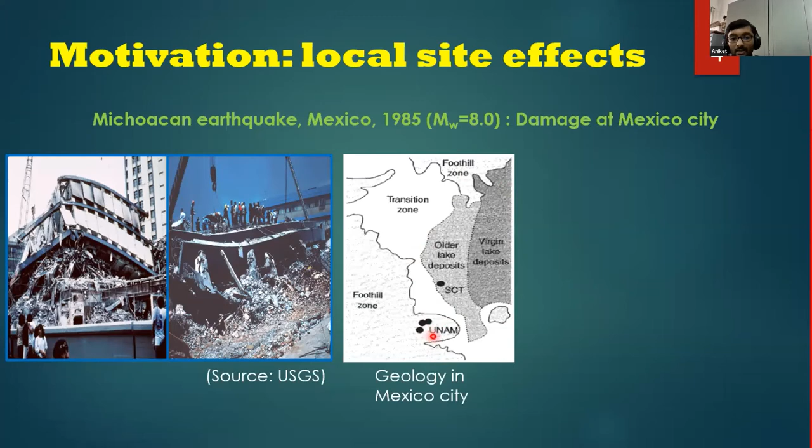The same thing was verified by the motions recorded on the two sites. The response spectra clearly indicates that the spectral acceleration at the SCT sites are significantly higher compared to the UNAM site. This led to a conclusion that during an earthquake, the waves may travel tens or hundreds of kilometers in any direction, but the top few meters below the soil surface plays a major role in the damage to the structures. Therefore, the understanding of local site effects is very important from the earthquake point of view.

Now, why do we require surface wave testing? We know the importance of local site effects, and to study them, an important parameter is the shear wave velocity profile of the soil. To get that, the most popular methods are the surface wave methods, particularly the MASW method, or the multi-channel analysis of surface waves method. But there is an issue with the Indian codes on earthquake, that they give very less importance to local site effects, unlike other codes such as American codes or Euro codes.

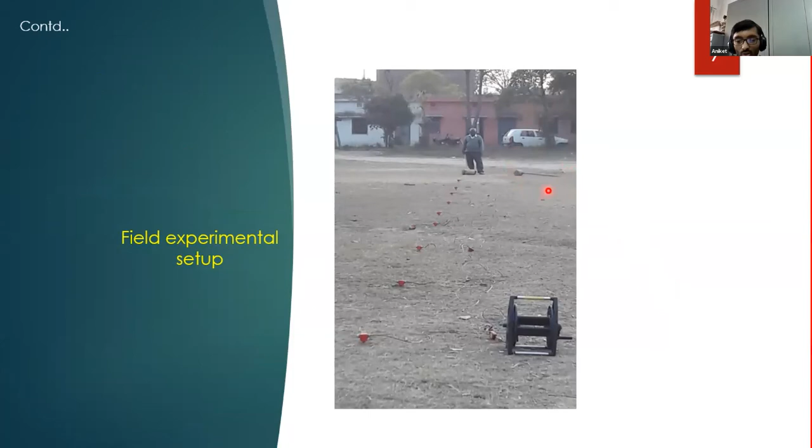Let us now see what is the MASW test. This is the field experimental setup of the test. This is the hammer which is used to apply the blows on the soil and generate waves. These waves are then recorded on a number of geophones which are placed in a linear array. This is just step one.

Overall, it's a three-step process. Step one is the data acquisition, as we saw. In step two, using the acquired data, we make a plot between the phase velocity of the Rayleigh waves and frequency, which is called the dispersion curve. And finally, using the dispersion curve, we prepare the VS profile of the soil.

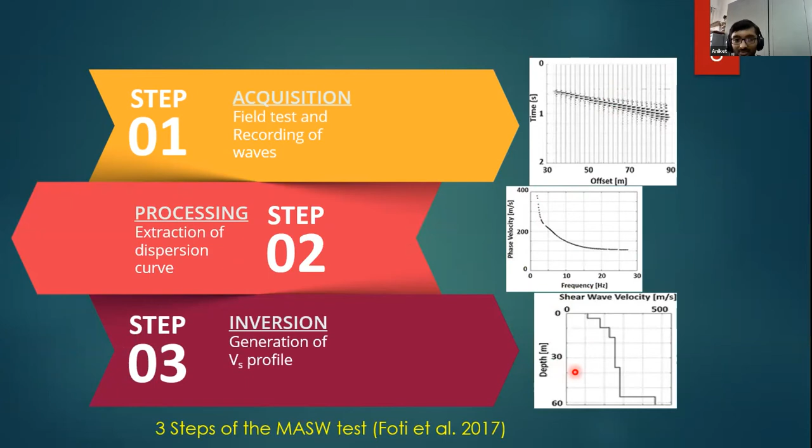This seems to be a very simple process, but there is uncertainty with this test. Suppose we have an experimental dispersion curve from the MASW test, but when we do the inversion, a single curve provides a number of shear wave velocity profiles which are equivalent to this curve. Now, which one is the best one? We can't say directly. So this is the uncertainty with this test. Our work focuses on how to reduce these uncertainties using borehole information.

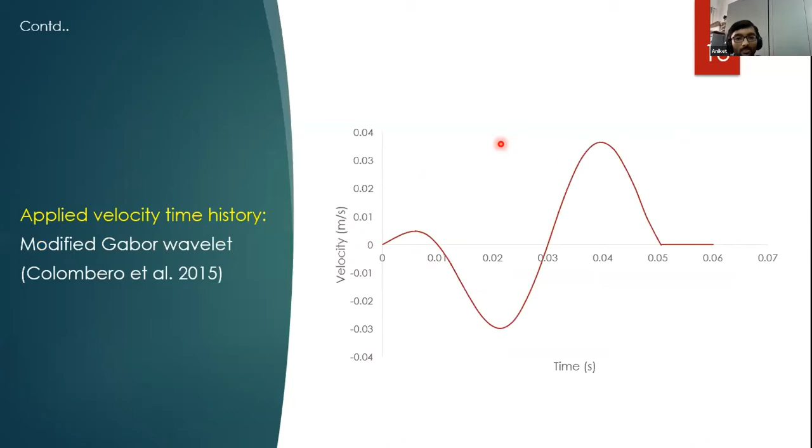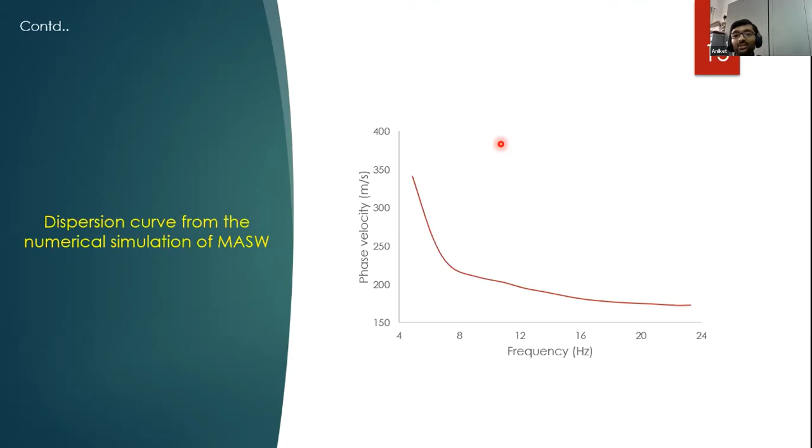So we considered 3 cases. The first 2 cases are those in which there is no borehole information, so we must assume the number of soil layers because we don't know anything. In case 1, we assume that there are 3 layers. In case 2, we assume that there are 5 layers. And in case 3, now we have the borehole info. We know the actual number of soil layers, we also know the thickness of the layers, and using that, we carried out inversion.

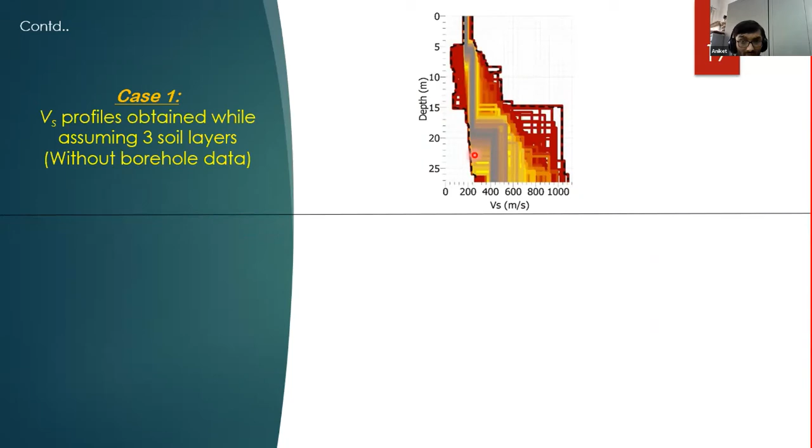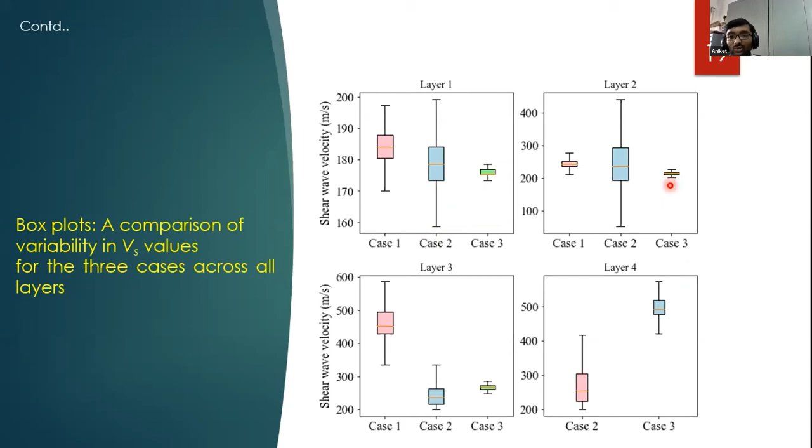If we look at the results of layer 2, layer 3, and layer 4, the same thing is observed: whenever the borehole information is available in case 3, the variation in the VS values is significantly less. So these are the conclusions from our work.

Whenever an MASW test is carried out along with the borehole information, the final results in terms of the VS profiles are very much confined to a narrow band. Therefore, it can be strongly said that the uncertainty associated with the MASW test is significantly reduced when we have information about the number of soil layers and the thickness of soil layers.

It is recommended that any study on local site effects using the MASW test should be complemented by other tests, such as the standard penetration test or some other test which can provide the borehole information.

There is an opinion from our side that the Indian code on earthquakes should give sufficient importance to local site effects, because in India also, during the Bhuj earthquake, significant damage at Ahmedabad city was observed due to local site effects. Also, it is high time now that there should be a dedicated code on seismic surface wave testing, which should provide guidelines on how to conduct the testing and help everyone.

These are our references.

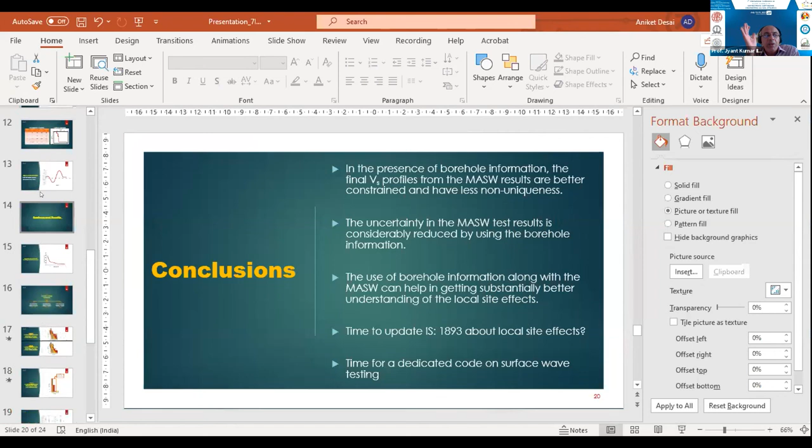Otherwise, what will happen is if you are using a fixed support, waves will reflect from the boundaries and you will have some issues. Yes sir, we thought of that. The right vertical boundary, I see you provided a hinge support. Yes sir, and at the bottom also you have provided a fixed support. Yes sir. So if you don't provide absorbing boundaries, the waves will get reflected and affect your answer.

But you have not made any attempt to absorb the waves, you have just located the boundary quite far away. Am I right? Okay, fine. Yes, last question.

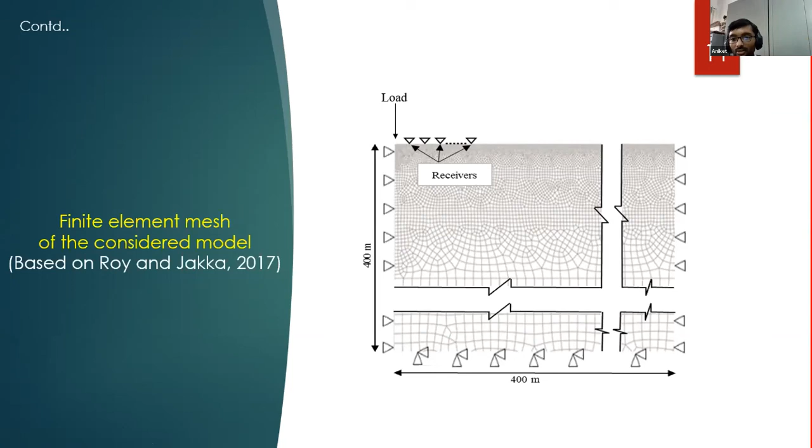But sir, one more thing. We actually checked the recorded signals also, and we verified that there is no reflection. Okay, fine, last question from my side.

This load is a line load or a point load? Point load. So you are carrying out an axisymmetric analysis. Yes sir. So whatever analysis you have done, it is for an axisymmetric case, am I right? Yes sir.

Rajiv, thank you very much. Thank you for your very informative questions. Thank you very much. I can see one question in the question chat box.

Mr. Anand has put a question for you: have the outcomes of the MASW results, after considering the subsoil VS profile, been compared with the cross-hole seismic test? Should I repeat? Yes, I got it. Actually, we have not conducted a cross-hole test, so we cannot say anything about this.

Okay, so fine. Mr. Anand has asked: Aniket, in Abaqus, do you have provision for absorbing boundaries? I could not see it till now.

This is a follow-up to Professor Jyant's question. The question asked by one of the audience is very interesting. If you want to really validate your answer by MASW, cross-hole and down-hole tests are the best tests, in order to validate the answer. Otherwise, if you want to extract the sample and carry out a resonant column test, you won't be able to do it. So you can think of planning such work in the future.